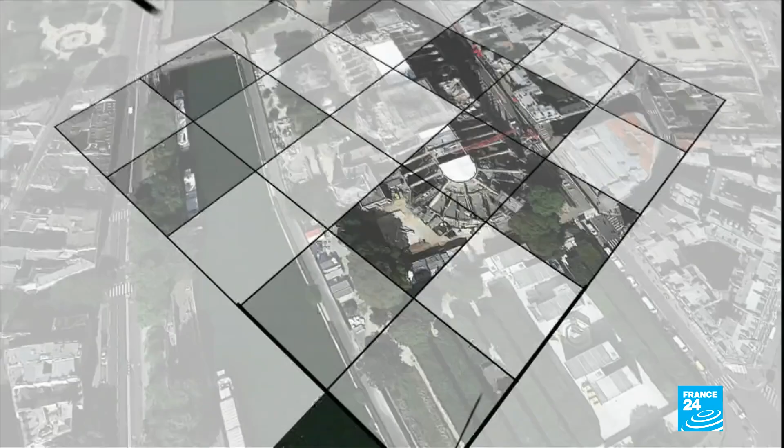It broke out beneath the roof of the 12th century cathedral amid restoration work, quickly spread across the top of the building and onto the 96-metre wooden spire. As the fire raged, huge parts of the roof fell into the nave below, and it melted many of the 40,000 pieces of scaffolding involved in the restoration. There was a real risk that the whole scaffolding structure would plummet to the ground, taking much of the cathedral with it.

As onlookers from across Paris watched from the ground and television viewers watched across the world, the spire came crashing down. A huge outpouring of emotion that one of the greatest iconic buildings the world has ever seen could soon be gone. In the end, the more than 400 firefighters involved in the battle to save Notre Dame largely achieved just that. Extensive damage, yes, but the main structure of the building saved.

We will all rebuild this cathedral together. It is undoubtedly part of the French destiny, and it's a project that we will have for years to come. Starting tomorrow, an international call will be launched well beyond our borders. We will seek out the greatest talents, and all will contribute. And we will rebuild. We will rebuild Notre Dame because this is what the French expect, and this is what our history deserves.

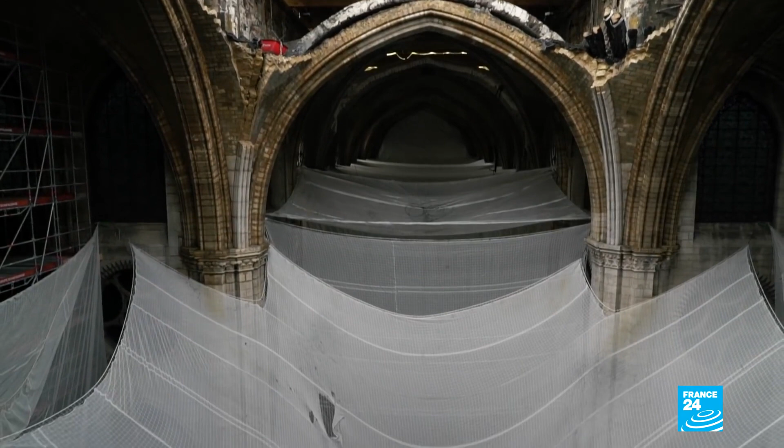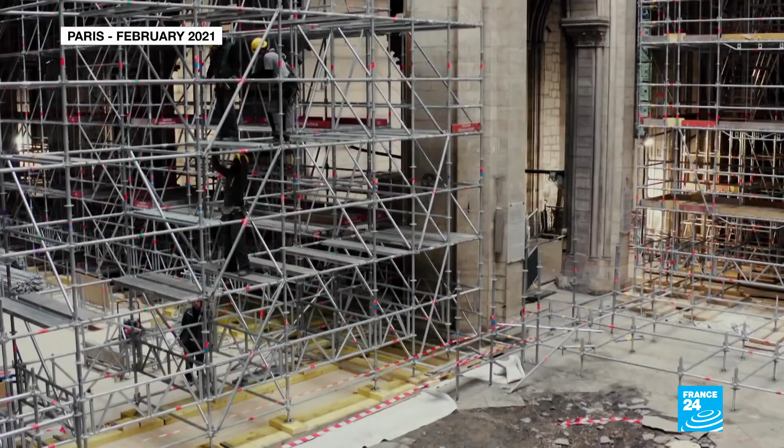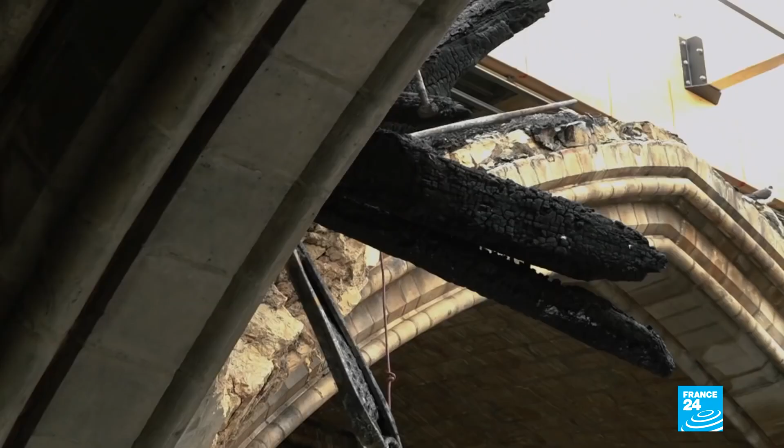An open wound gapes at the heart of Notre Dame, the giant hole where the cathedral's spire crashed through the roof on that fateful evening in April 2019. It fell. All the material fell right down to the floor here. It almost completely destroyed the floor of the intersection and damaged the floor of the nave and of part of the choir area.

Pascal Prunet is one of the chief architects tasked with securing and rebuilding Notre Dame, a giant medieval structure that's exceptionally fragile. Everything is slender. The walls are thin, the pillars are thin. It's almost as though the material has been stretched right out and it hasn't been reinforced. So it's often right at the maximum capacity or limit of the stone.

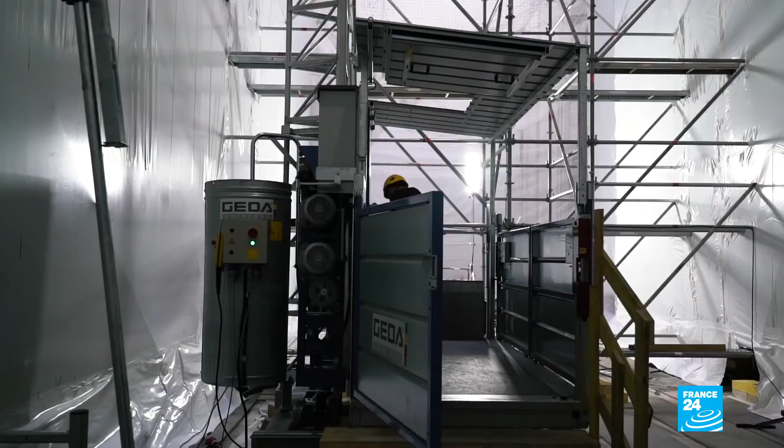The most delicate part lies above a forest of scaffolding 28 meters high. You can see this whole choir area. The scaffolding here is like an internal cathedral of its own. It's a beautiful vision, architecturally, even if it's only temporary.

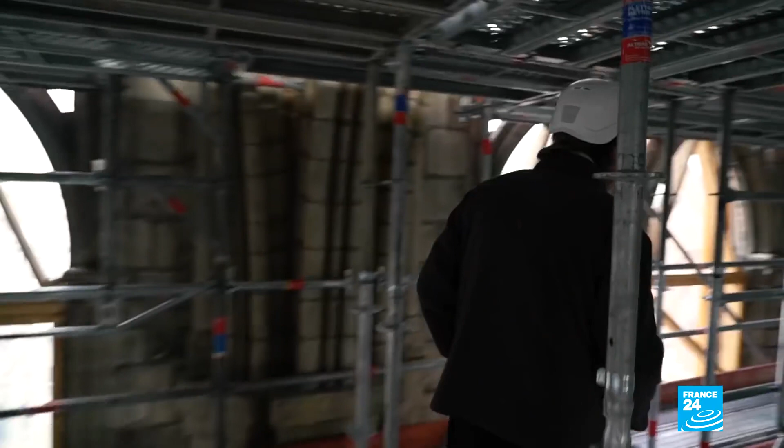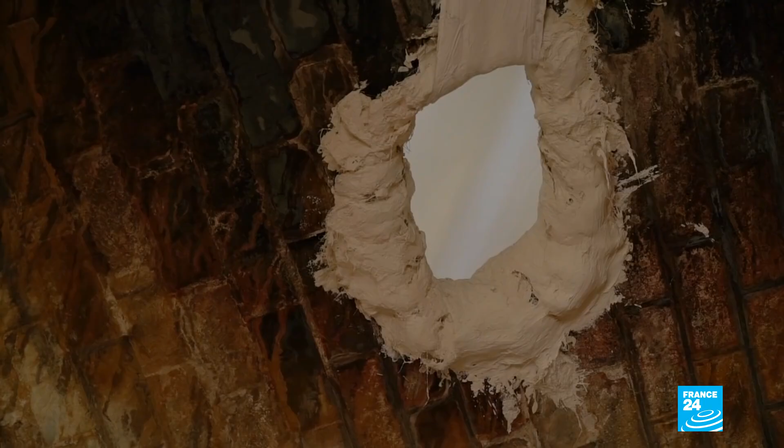In the final stage of shoring up Notre Dame, what remains of its vaulted ceiling needs to be urgently reinforced. A large-scale operation is imminent. Here you can see an area which has been badly damaged by the fire. These vaults were only about 12 or 13 centimeters thick, and the fire probably caused it to lose 2 centimeters of that, above miraculously intact stained windows, warped stones, blasted by the firefighters' hoses, and cracks dating back to the Middle Ages, reopened by the extreme heat.

If you're talking about fragile, look at that area up near the top of the vaulting, which is completely grey. The stones have probably been cooked. We'll have to replace them. They resisted temperatures of 800 to 900 degrees Celsius.

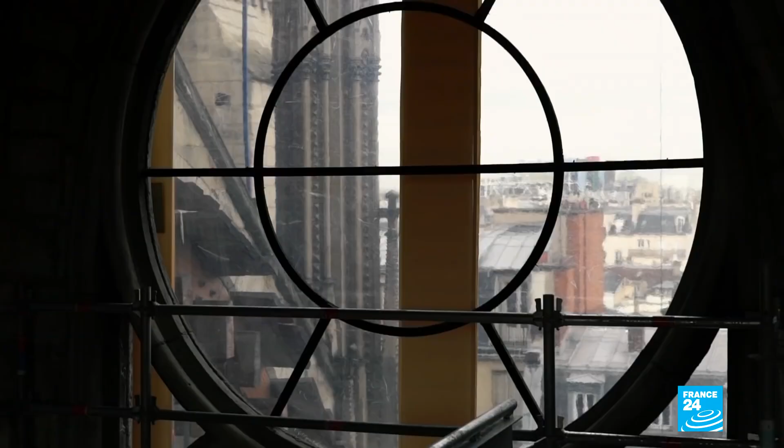The inferno which raged through Notre Dame sent a shockwave through the heart of Paris.

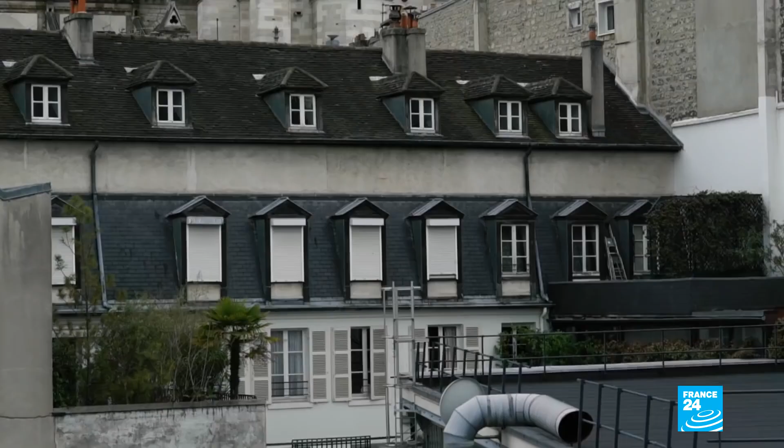For the past two years, local resident Isabel has been in mourning, and yet her memories of the fire remain very raw. I remember screaming when we saw an absolutely gigantic flame that was higher than the two towers and bright orange. That image, even now when I'm talking about it, it's just a vision of horror.

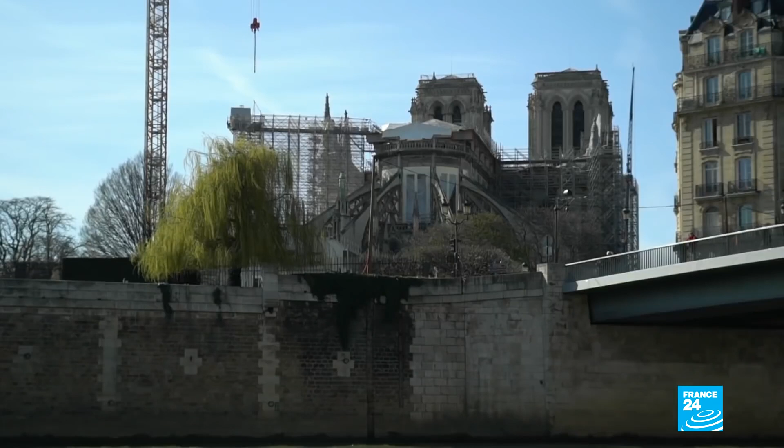I am a Christian, a member of the parish here. We have a very personal attachment to Notre Dame. It was as though it called out to us, as though we were drawn to it. When I started living on the Île de la Cité, I started going to Mass. It was as though it was impossible to resist.

It wasn't just the faithful who flocked to Notre Dame. Before the fire, it was France's most visited monument, attracting some 13 million tourists a year. Local businesses were feeling the loss long before the coronavirus pandemic.

Ferid runs a restaurant previously filled with international visitors. Do you remember how it was before? Of course. There were crowds, it was incredible. It's unbelievable. All the tourists who brought Paris and Notre Dame to life, they brought this area to life, but they're not here anymore. It's virtually dead, that's sure.

I don't even see many local residents anymore. I think a lot of them have left. Yes, many have left. The neighbourhood is not like before. It's sad. I can't wait to get back to life as it was. That's right.

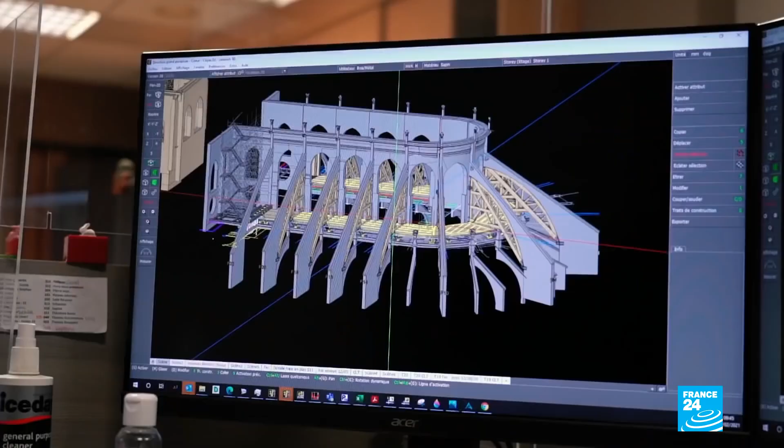Working to return Notre Dame to its former glory are expert tradesmen from all over France. 300 kilometres to the east of Paris, one firm has been working flat out on huge arches to hold the damaged stonework in place, using 3D modelling for maximum precision and speed.

These are emergency measures. We have to make the pieces and get them out as quickly as possible. If we had to make them on site, we'd still be there in 10 years, or more than 10 years.

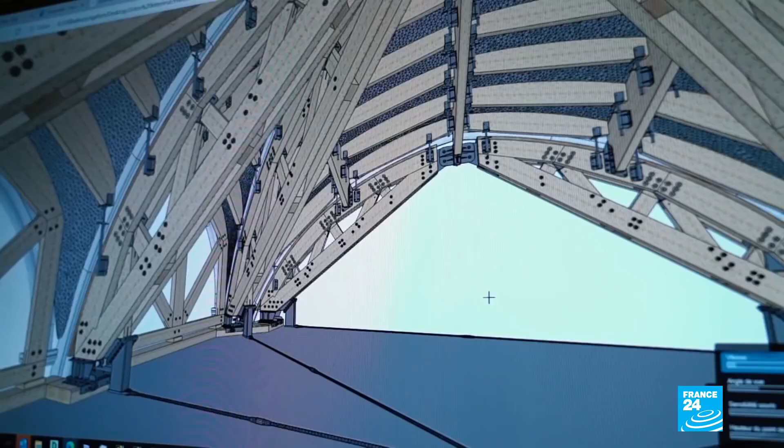The last restoration of Notre Dame's medieval structure took two decades back in the mid-19th century. We can't afford to make any mistakes.

When the cathedral was originally built, at the time they used perfectly shaped pieces, but over time the building moved and became deformed. And then there was the fire, so we're no longer working with perfect shapes. That's why we can't do without 3D modelling now.

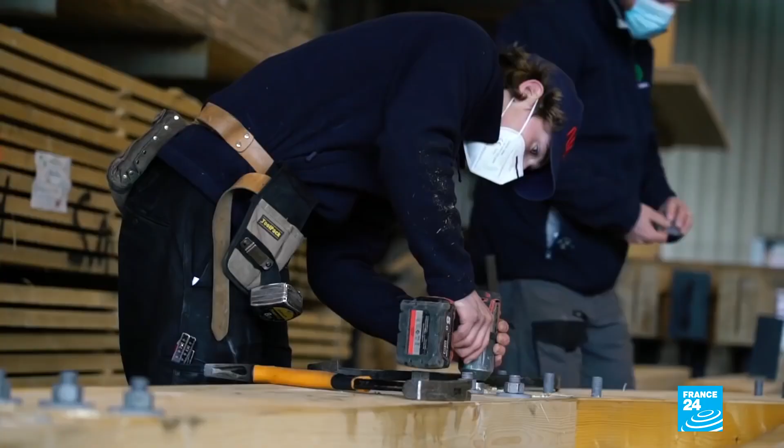They're constructing 52 arches. Every angle, joint and plank is unique. It's essentially a vast 3D jigsaw to reinforce the top of Notre Dame using the latest technology.

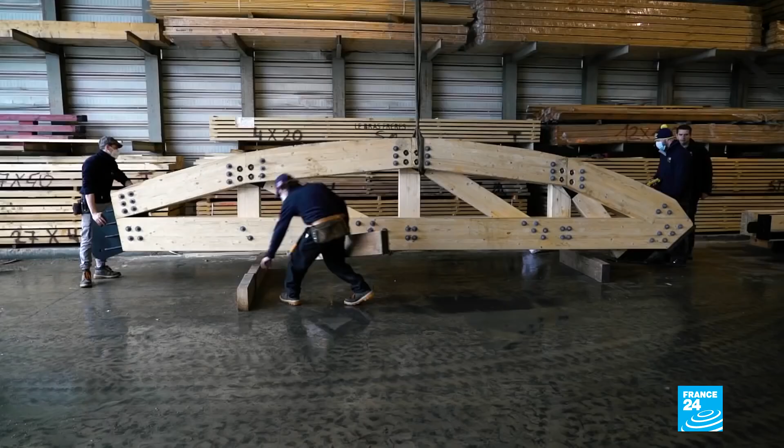This is one of the finished pieces that we're going to place right under the vault to relieve the pressure on the stone.

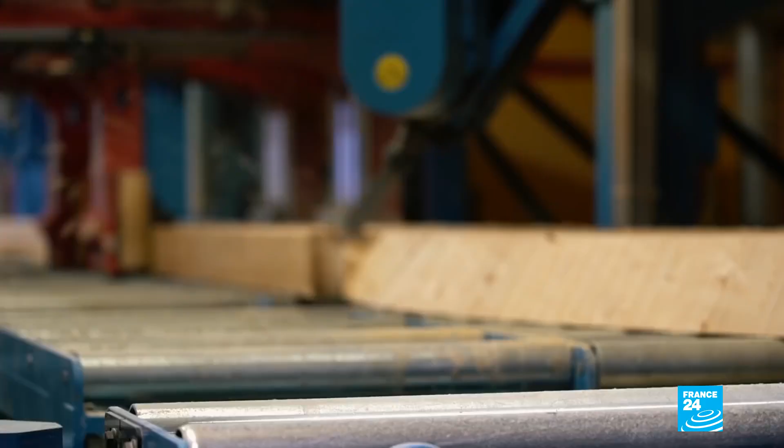This is a robotic arm which can produce a curve. It can do any form. It's technology that works very quickly. We have to be accurate right down to the nearest millimeter. Everything has to meet that standard.

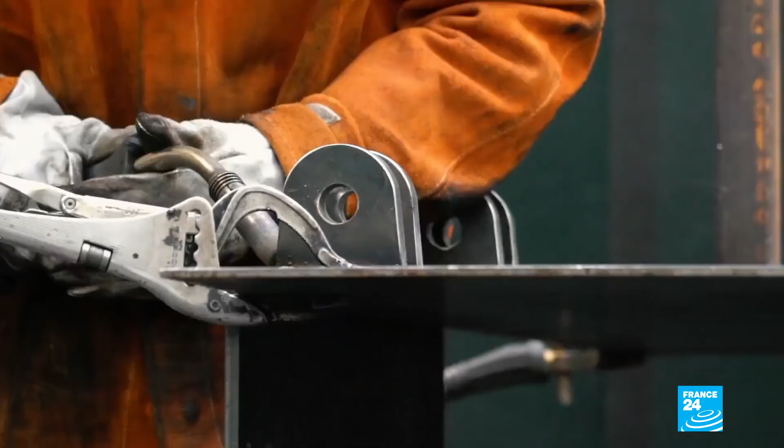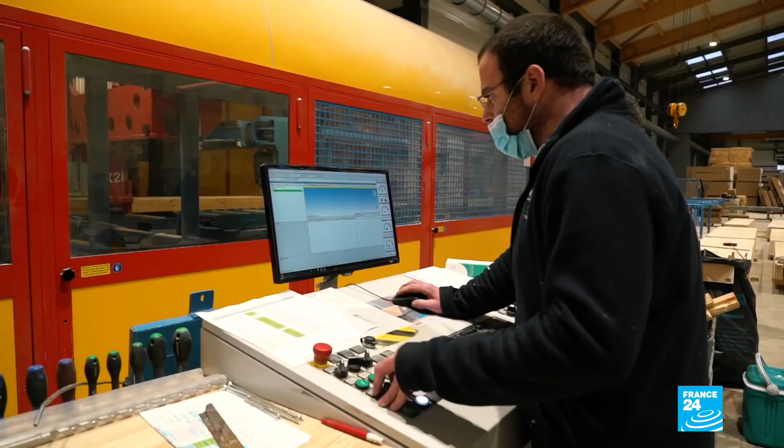Damien is the technical director of Le Bras Frères, a firm which has previously restored the Louvre and the Château of Versailles. They were also working on the roof of Notre Dame on the day ahead of the fire, and watched in horror at a distance as the firefighters battled the blaze and accusations flew.

At first, we couldn't believe it. People were saying Notre Dame is on fire, but we didn't understand what was going on. We were far away, we could see the fire spreading, the spire collapsing. It felt terrible. We couldn't believe it, actually. We watched it all night on TV.

Our job is to build beautiful frameworks, good quality, following all the rules, and then this. There were false rumors flying around, people hinting that we were behind the accident. It was a lot to take.

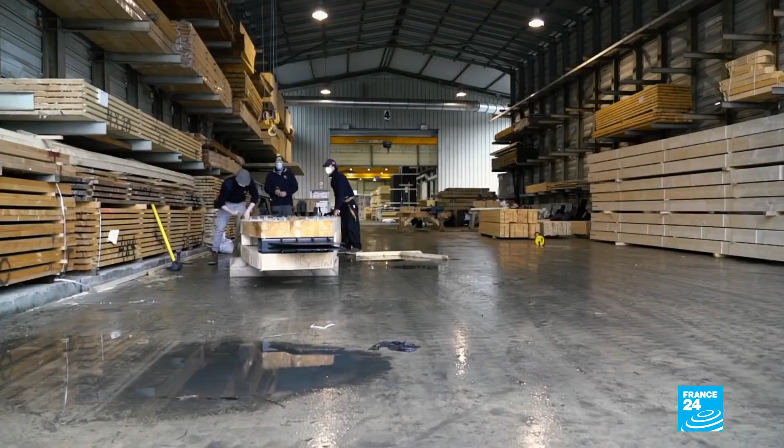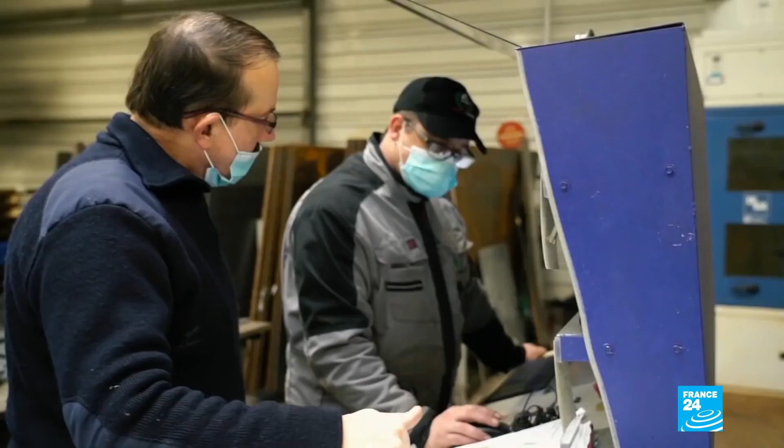The company has now been classed as a plaintiff in the ongoing investigation into the Notre Dame fire. And Le Bras Frères employees helped to save the cathedral, working around the clock to build emergency supports to prevent the edifice from collapse.

The main goal was to save Notre Dame. It's Notre Dame, it's world-renowned, our pride and joy.

We're all from a small village here. We're working class, country folk. We're strong, we know how to get back on our feet. We get back up and move on. Our first aim is to make it safe, and then hopefully rebuild it.

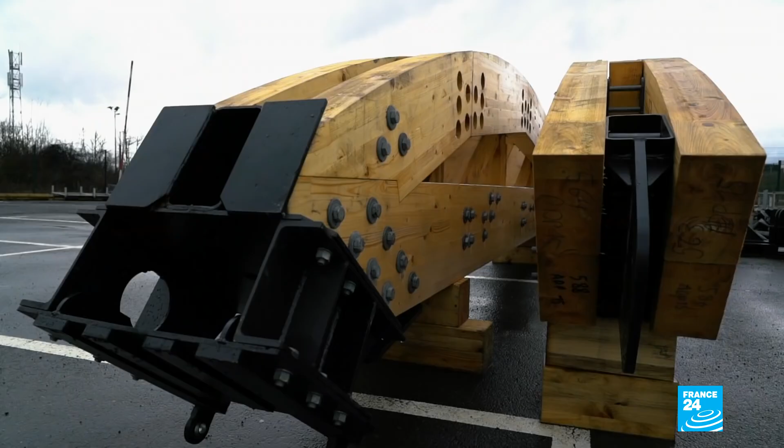In just a few weeks' time, Le Bras Frères is due to complete the consolidation of Notre Dame's vaults. Meanwhile, back in Paris, work has already been taking place on test sites, exploring how to reveal hidden treasures inside the chapels of Notre Dame.

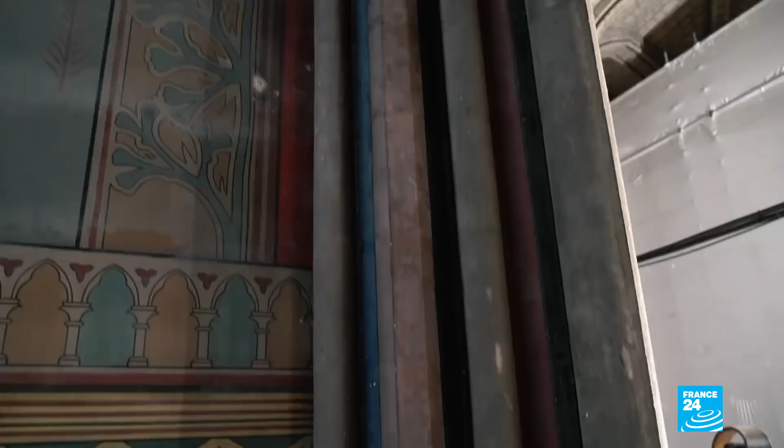The lowest parts have suffered the most from the fire, the dust and the humidity, and the water sprayed everywhere by the firemen. During our work, after cleaning it off, we discovered the amazing colours underneath, which date back to Viollet-le-Duc.

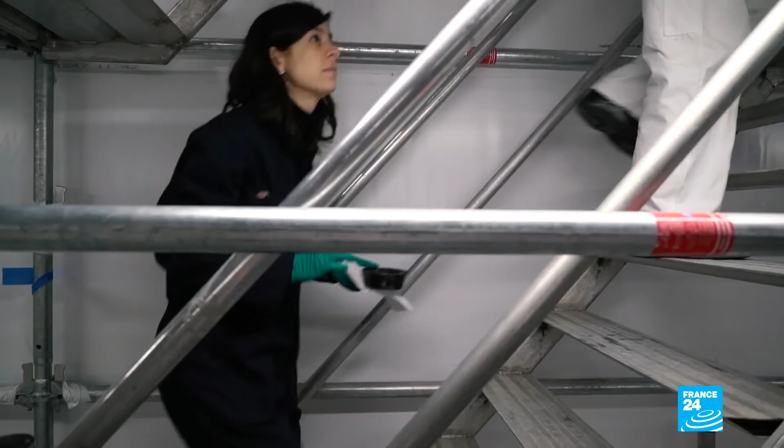Viollet-le-Duc, the legendary 19th century architect who restored and overhauled Notre Dame. Since then, 150 years of dust meant that lead from the burnt roof stuck to the walls. Cleaning that off has revealed a surprisingly bright palette.

You can see the colours match the stained windows. This blue here matches the windows. This red matches the windows, and the same colours appear on the columns. There are colour effects everywhere.

Like the rest of the cathedral, these chapels are being restored exactly as they were in the 19th century. As restorers, we're not changing or adding anything. The range of colours you can see here are the originals, chosen by Viollet-le-Duc.

Marie's team of restorers worked for 2 months to breathe new life into the walls of the test chapels, trying out techniques for the upcoming restoration and getting an unparalleled preview of the dazzling artwork.

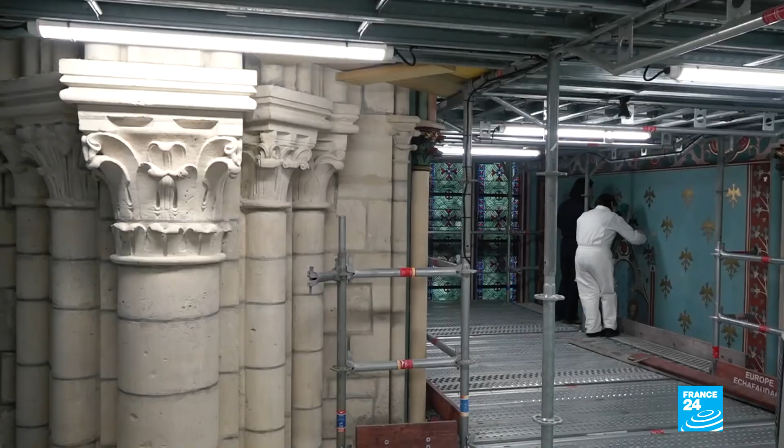We often say we're between the sky and the soil. Our viewpoint is exactly the same as the painters who originally did the decor. We're right in the same place, at the same level. It's so nice. We get to see the original brushstrokes.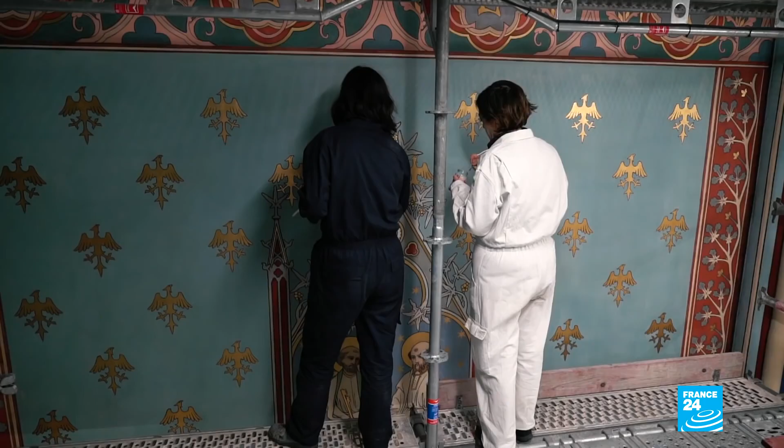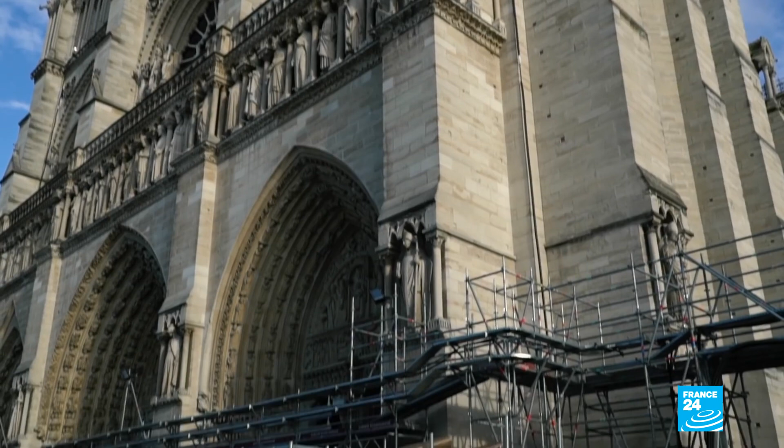Notre Dame will soon boast colours brighter than in living memory, which visitors should be able to admire in a few years' time, if the restoration deadline can be met.

The first stone of this cathedral was laid in the year 1163, and ever since then there's always been building work here.

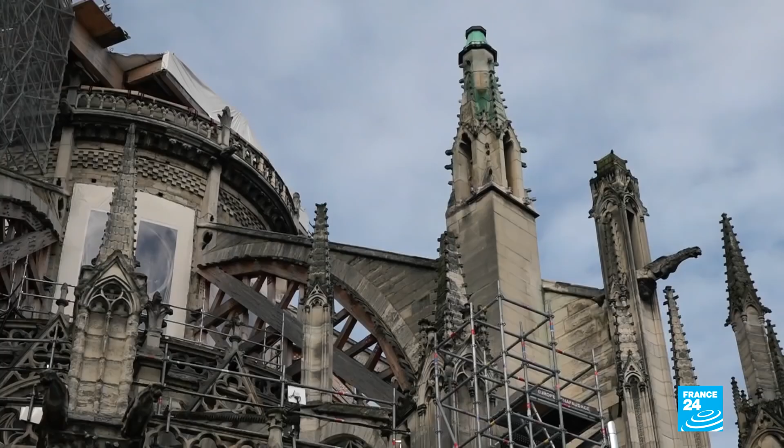A French army general, Jean-Louis Georgelin, was named by President Macron to oversee the monumental works, which have already suffered setbacks, lead contamination, coronavirus and bad weather.

It is an extremely ambitious schedule, but we are still on course to reopen the cathedral to worshippers in 2024. It won't be completely finished, of course. There will still be work to do on the outside, notably the outside wall, and other work to finish. And above all, we have to finish the consolidation of the building, which will only be done this summer.

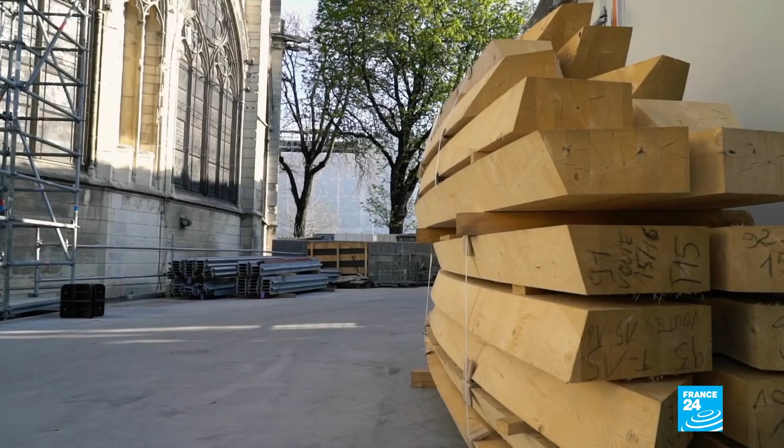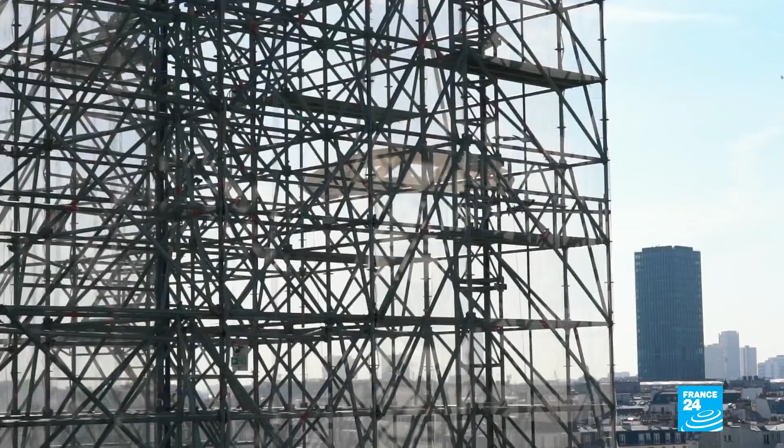For the ultimate but risky stage in making Notre Dame's structures safe, the 28 wooden arches from eastern France are arriving in Paris. They have to be lifted 30 meters high, right over the fragile edifice, in a perilous operation.

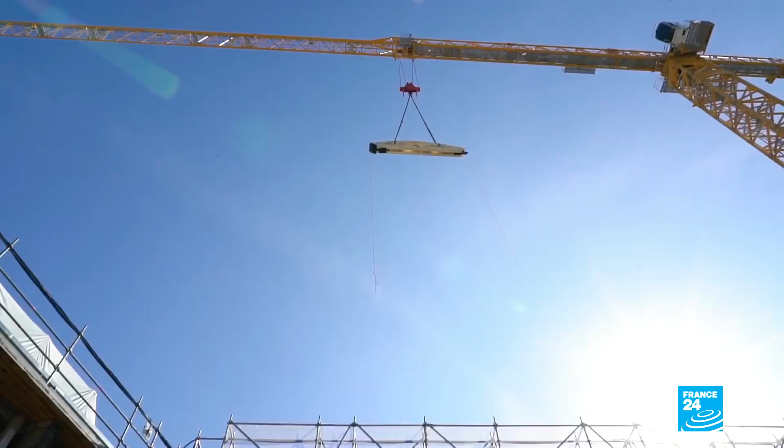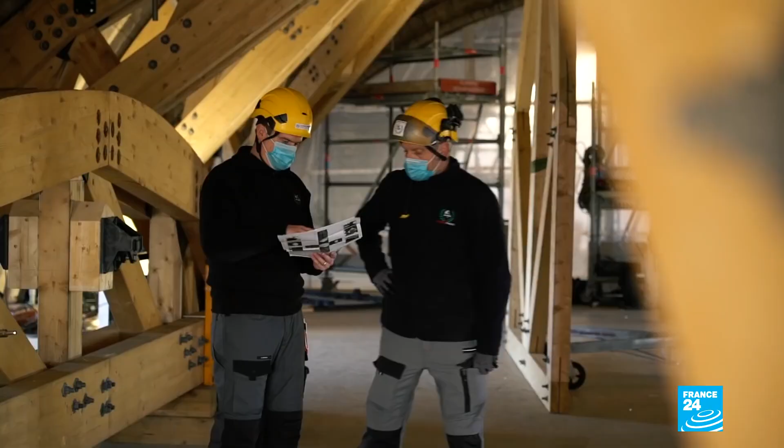We catch up with Damien Brisson from Le Bras Frères underneath Notre Dame's badly damaged vaults.

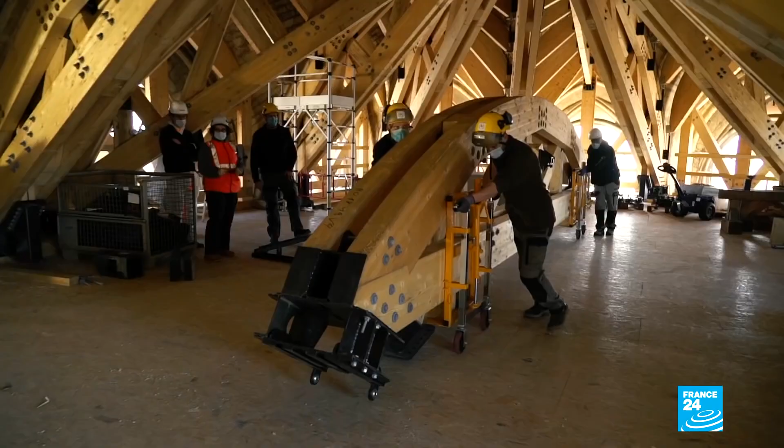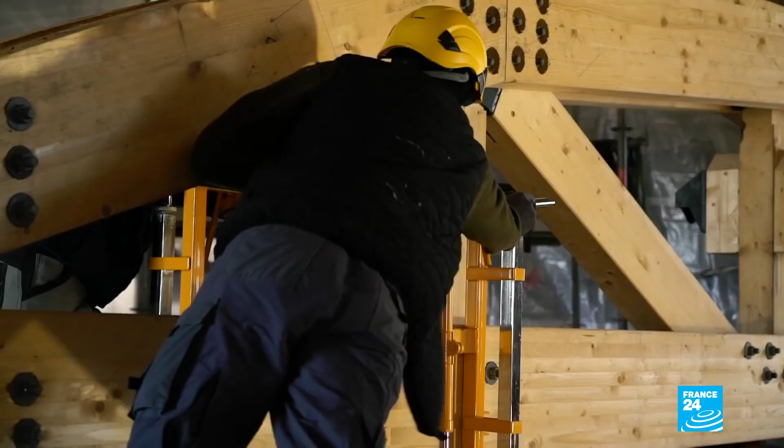We're providing relief for the cathedral, giving it crutches, support, because there are many weaknesses. The arches weigh around 1.5 tons each. Every time they hoist one into place, Damien and the team hold their breath.

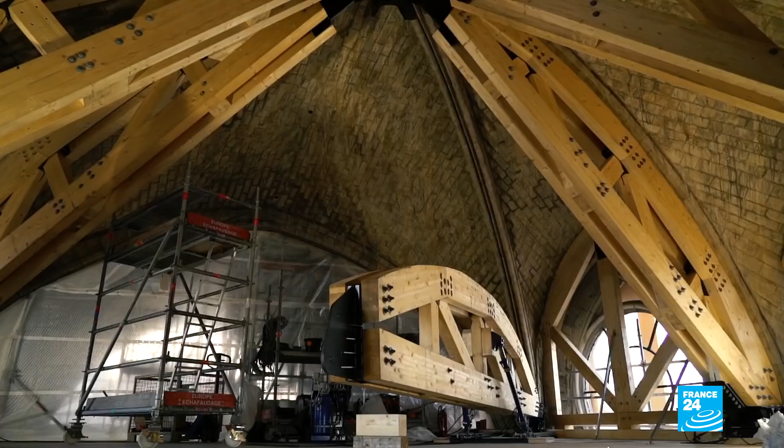It's far from simple. It's always a big responsibility. We've got workers underneath. There's always a risk. With a bit of wind, you never know. But it's going well. We're very happy, and the work is continuing.

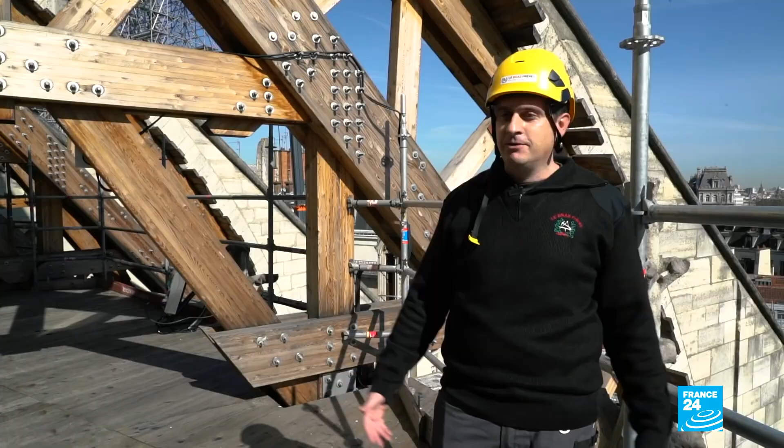After months of work, it's a huge relief to finally secure the cathedral's vaults. The Notre Dame experience is on our CV now, but I think we don't really realize what we're a part of. But when we see the arches in place, we're very happy and, yes, proud.

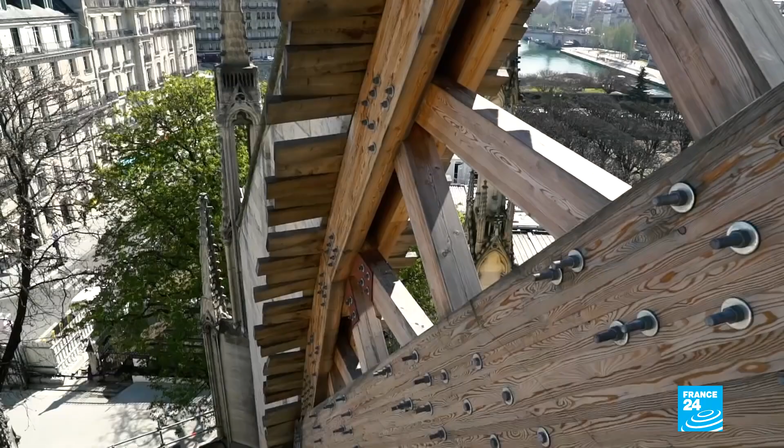Proud is the word on everyone's lips as this phase of Notre Dame's revival comes to a close. We're all very proud to work on this building site. Proud because, it's been said a lot, this monument is an emblem of France. It's the Gothic cathedral par excellence.

And we are aware that the world is watching us. The whole world is watching our progress. We're aware of all that's at stake, we're aware of the difficulties, and we can't afford to make any mistakes. We are all working hard to complete this project and complete it well.

There remains a great deal of painstaking work before Notre Dame can rise from the ashes. Until then, the 850-year-old edifice will have to bear its wounds, right in the heart of Paris.

Catherine Norris Trent and Melina Huet revisiting Notre Dame for France 24.